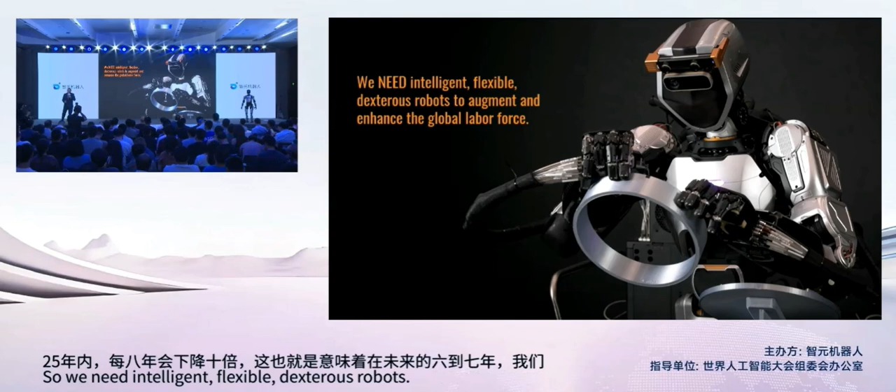So when we talk about enhancing the global workforce, there's one common factor that the global workforce has. The global workforce is about 2.6 billion people, and almost all of those people have hands. Human labor is designed around the human hand, and the human hand is very challenging.

So when I'm talking about the challenges that we've faced at Sanctuary, and being faced by other humanoid companies, one of the primary ones I'm going to talk about today is making dexterous hands.

The underlying challenges with that are many. One is power density. The human hand is quite strong, with many different grasps and affordances of those grasps that require quite a bit of strength. Even something as simple as taking the cap off a water bottle requires a lot of strength in the human hand, and that's very difficult to mimic.

When you look at power density, the size of the human hand, and all of the motions, there's a lack of commercially off-the-shelf available components to make the miniature mechanisms needed to come up with an anthropomorphic hand.

Kinematic mapping, mostly as it relates to teleoperations and policy training via teleoperations, is a significant challenge. Then there's the level of dexterity — the human hand has 27 degrees of freedom. It's a very complex mechanism, and mimicking that requires very sophisticated mechanisms.

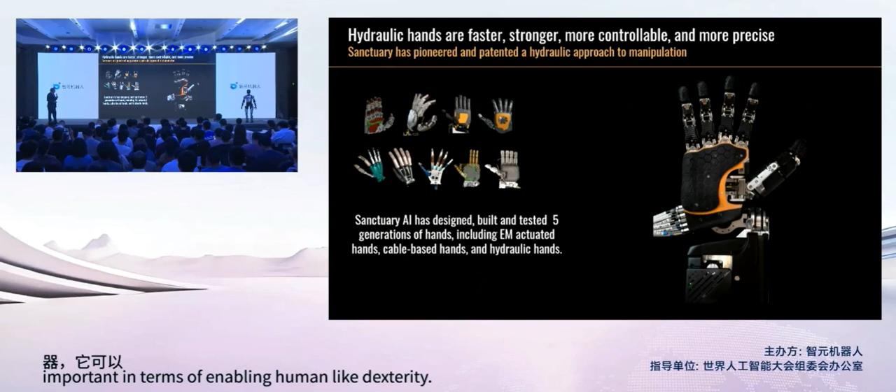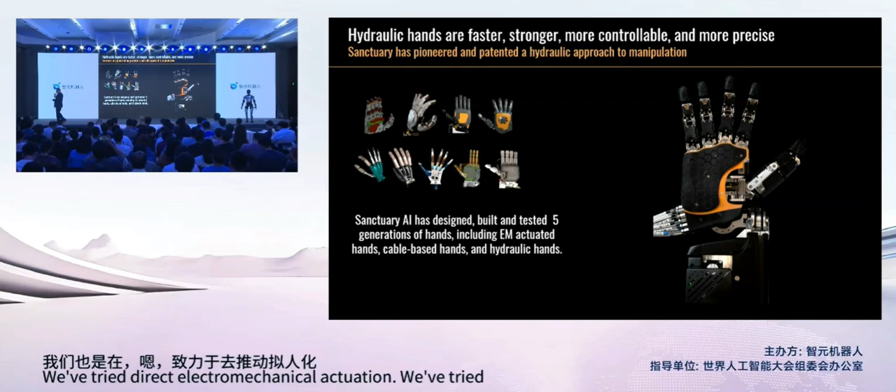So at Sanctuary, over the last 6 years, we've developed 5 different generations of anthropomorphic hands. We've basically tried everything — direct electromechanical actuation, cables, hydraulics — and it's our assessment that hydraulics is the only technology that can provide the right combination of strength, speed, and controls.

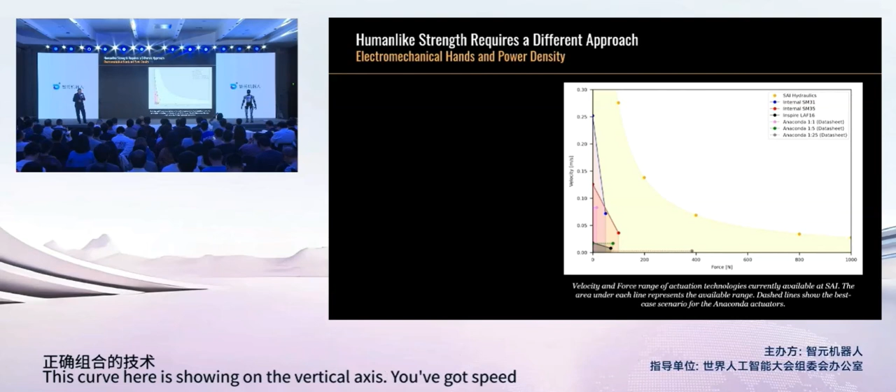This curve shows speed of motion on the vertical axis and force on the horizontal axis. These are different electromechanical actuators we've tried in various hands. You can get fairly good speeds with direct EM, but relatively weak force. If you look at the curve for hydraulics, you get very good speeds and very high levels of force.

So current electromechanical actuators really fail on power density. They're pretty good on the control side, but you just can't currently get enough power density out of electromechanical or cable actuation. Hydraulics need to be miniaturized, and that creates some different problems.

In terms of power density, DC motors are maybe 250 watts per kilogram, about half of human muscle, which is about 500 watts per kilogram. Hydraulics, depending on pressure and flow rates, is more like 2,000 watts per kilogram.

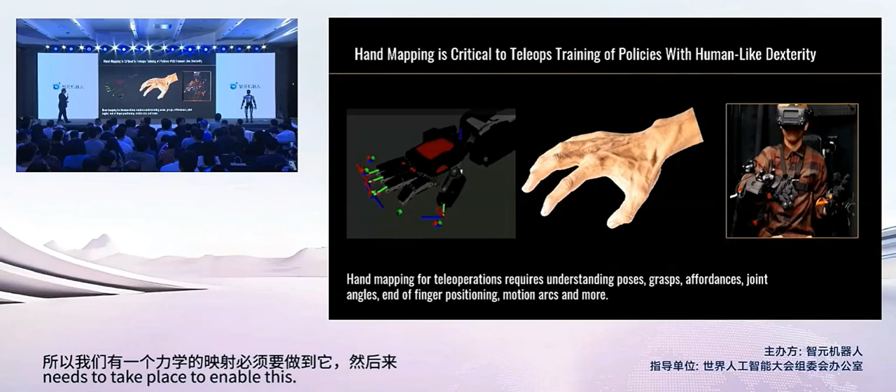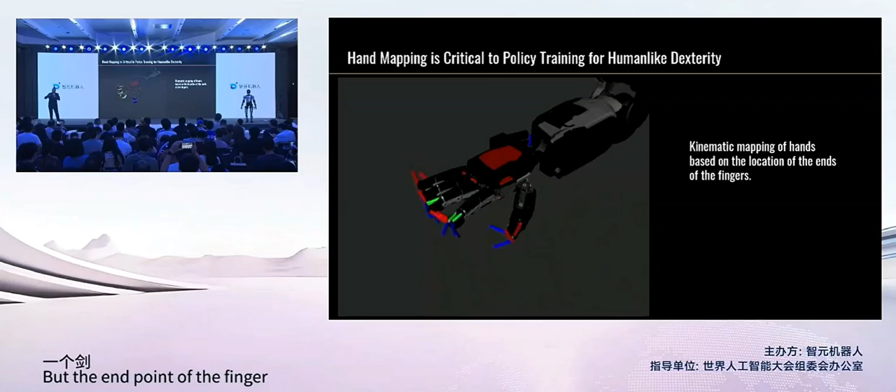So this video is basically showing the kinematic mapping of the robot hand, where we're looking at the end point of each finger. But the end point of the finger isn't particularly valuable from a controls perspective, because what you need to know is the joint angles - you need to be able to tell the motors how far to move, in what method, et cetera.

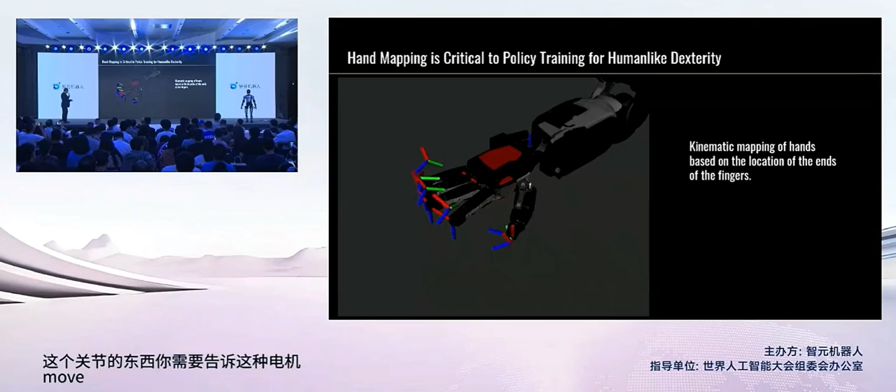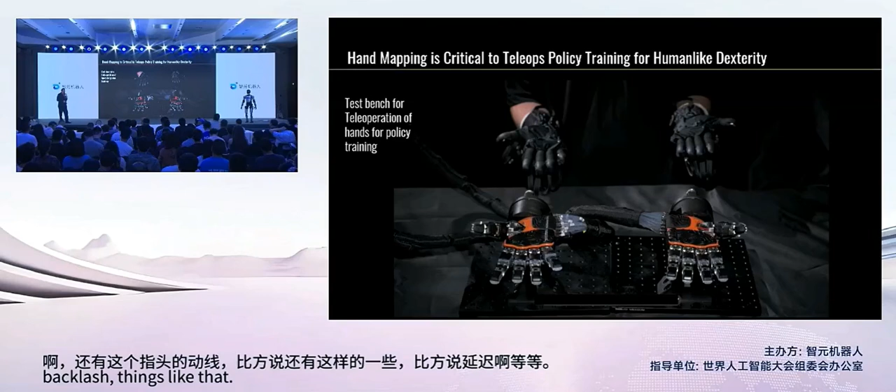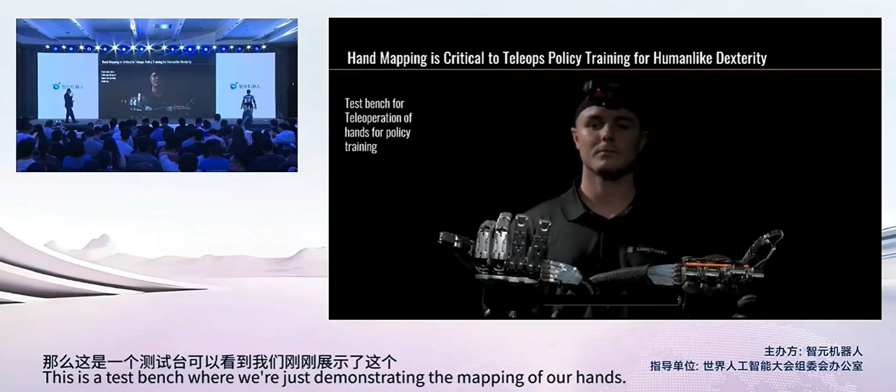This is a test bench where we're just demonstrating the mapping. If you look, the robot pilot has some fairly sophisticated haptic gloves that have about 70 different sensors in them.

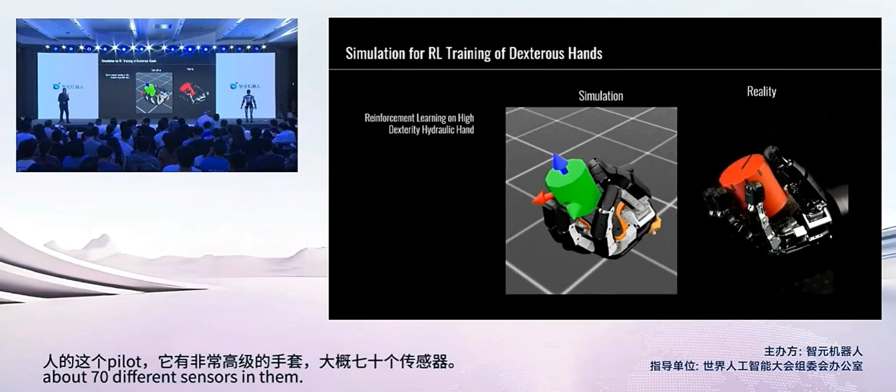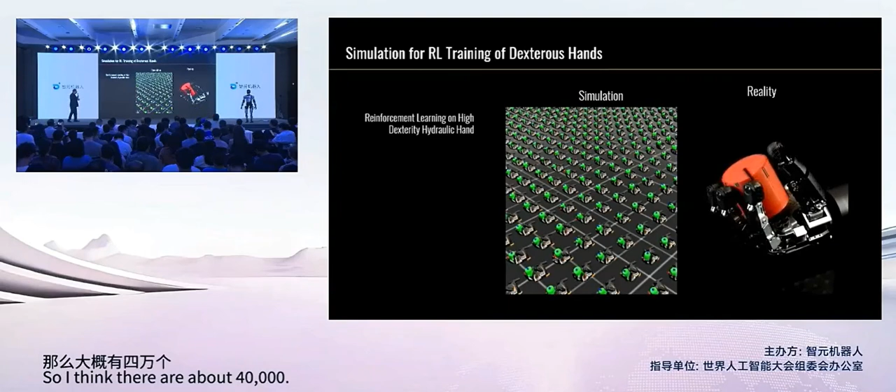Now, the problem with kinematic mapping and inverse kinematics becomes a lot less if what you're doing is simulation training as opposed to using teleops for your policy training. Here, what we've done is simulation training using the CAD data, doing in-hand reorientation or in-hand manipulation. I think there are about 40,000 simulations going on here, and this is the manifestation of it - the actual reality of the reinforcement learning training.

This is my favorite video. So we were talking about hydraulics being the only path to human-like strength. Here we're going to see a 5-kilogram weight attached to the bottom of this cylinder. The robotic hand is going to hold that upside down and do in-hand reorientation in a circular motion. I promise you 90% of the people in this room cannot do this.

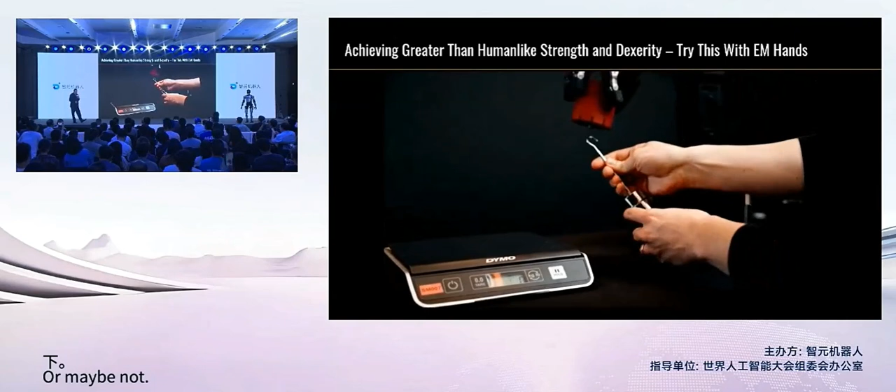And there are no EM hands that can do something like this. I'm going to play that one more time. Five kilograms is a lot of weight to hold upside down and then try and spin something like this in your hand. I'm having a hard time doing it with my remote.

So the last challenge with hands in achieving human-like dexterity is the sensors. It's the tactility, the touch, if you will, that allows you to manipulate objects. To do that you've got touch sensitivity - that's an important issue. You've got the durability of those sensors, the coverage of those sensors, and of course the latency those sensors may introduce, and then feedback to teleops.

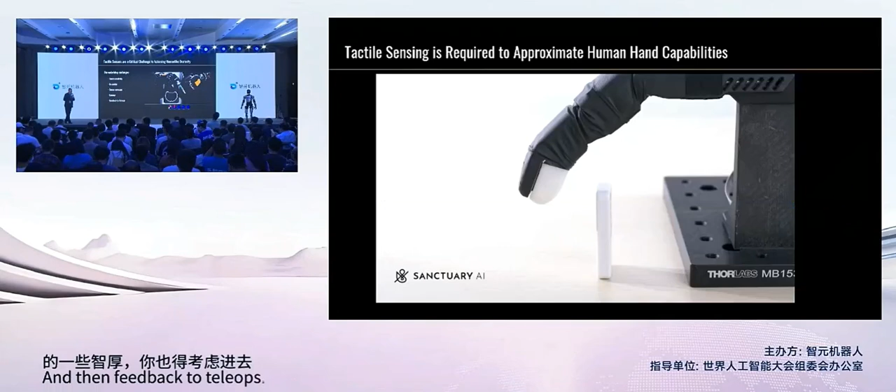So here's a demonstration of our in-house made touch sensors. Again, there's kind of a theme here - if we can't find it off the shelf, we have to go design and manufacture it ourselves. This is a test bench that's been told to move until you touch the domino and then stop without knocking the domino over.

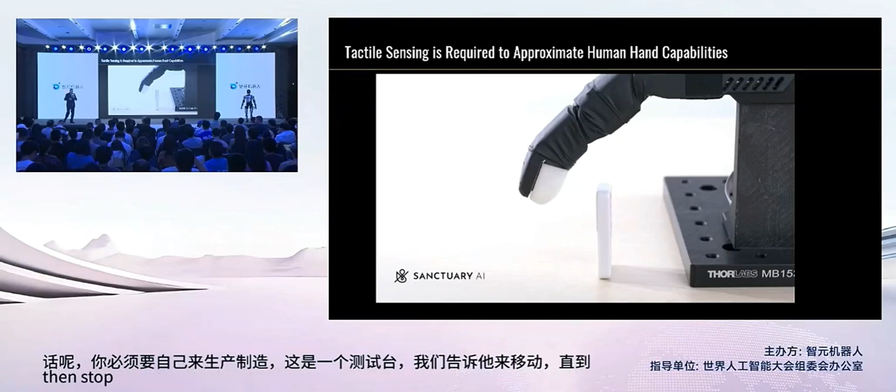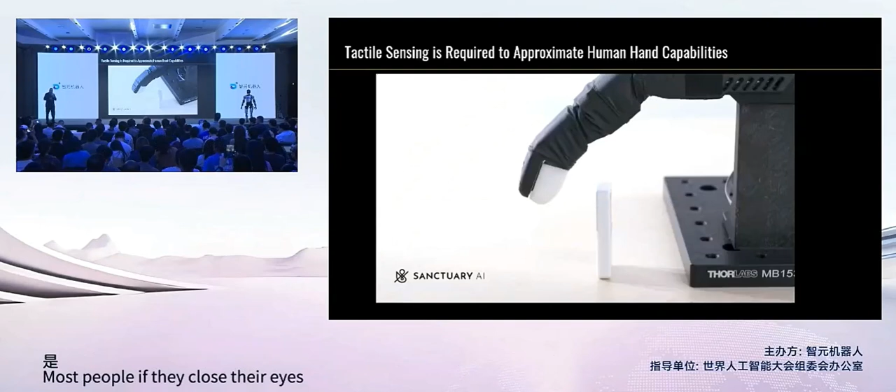When people come through to get tours of our facility, we show them this and ask them to try it themselves. Most people, if they close their eyes, cannot do this task. Now, if they have their eyes open, they can do the task. It's a combination of the visual and the touch.

But the challenge with having these sensors is for them to be really sensitive, they also have to be durable. This is what some of our sensors look like after having inserted some screws into a crankcase for one of our customers. You see they're a little bit torn up, so this is a big challenge we continue to work on. Replicating the sensitivity of human skin is a real material science challenge.

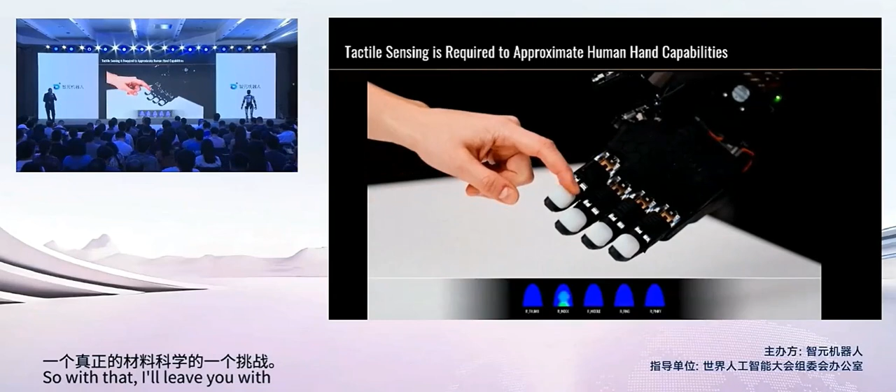So with that, I'll leave you with this last video where you can actually see our touch sensors in action.